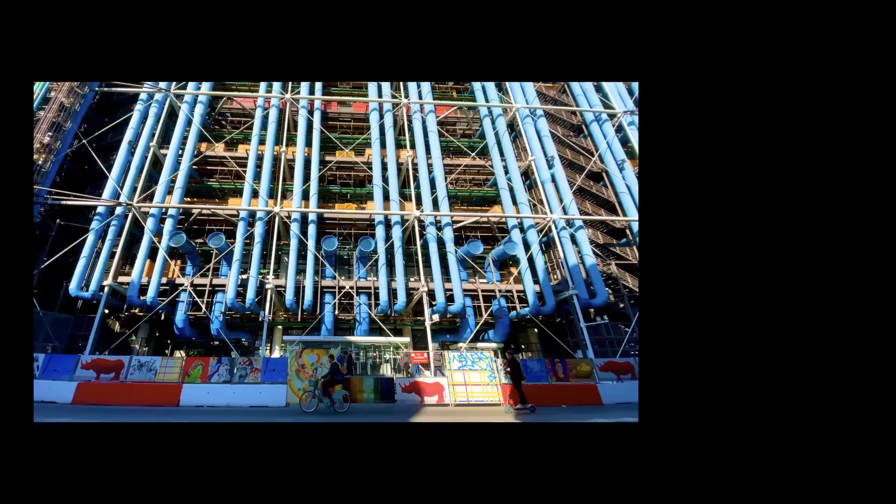Now, as Michael mentioned, I worked, for example, with the company that was renovating the Centre Pompidou in Paris, and specifically this facade that you see here with this bent glass on the hallways and the escalators of this facade. It's called the caterpillar of the Centre Pompidou. And because of the renovation, we needed to replace the glass due to changing security norms. And so we were looking for a new home for the glass.

And here is the new home for the glass. We were able to find a young designer firm called Maximum, thanks also to the collaboration of Pavillon de l'Arsenal in Paris, and all different actors who were involved in trying to find a new home for the glass, which is not such an easy thing to do today, to reuse building materials. It's not so straightforward, even though it should be.

All right, so why do I care so much about the reuse of these building materials, such as the glass from the Centre Pompidou? Well, first of all, the building sector is responsible for about 39% of all of our greenhouse gas emissions. So as actors of the construction sector, we have a huge role to play in the climate crisis.

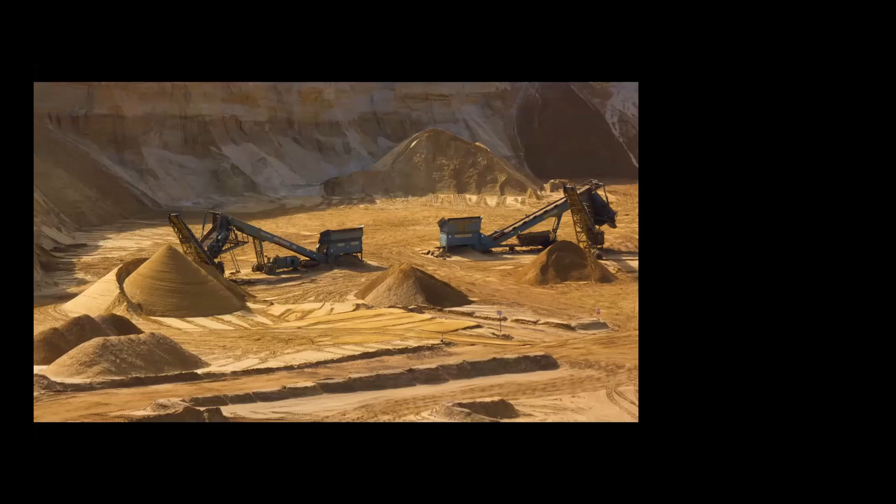But it's not just about the greenhouse gas emissions, it's also about much more than that. And often when we talk about greenhouse gas emissions, we talk about the operational emissions due to heating, cooling, ventilation, lighting, and so on. But when you look at the full life cycle of a building, it goes from the extraction of the raw materials to the transport of those materials to sites, to the construction, maintenance, and then in the end, end of life, demolition often. And so when you look at this full life cycle and you think about all of the resources that we deplete also to build our buildings, it's really crazy.

For example, we mine about 40 billion tons of sand every year, just because desert sand is too fine for construction to make concrete, for example. And this mining of sand is often at the cost of biodiversity, and we even have sand mafias forming, because sometimes it's done illegally as well. Just because we need so much of it for construction.

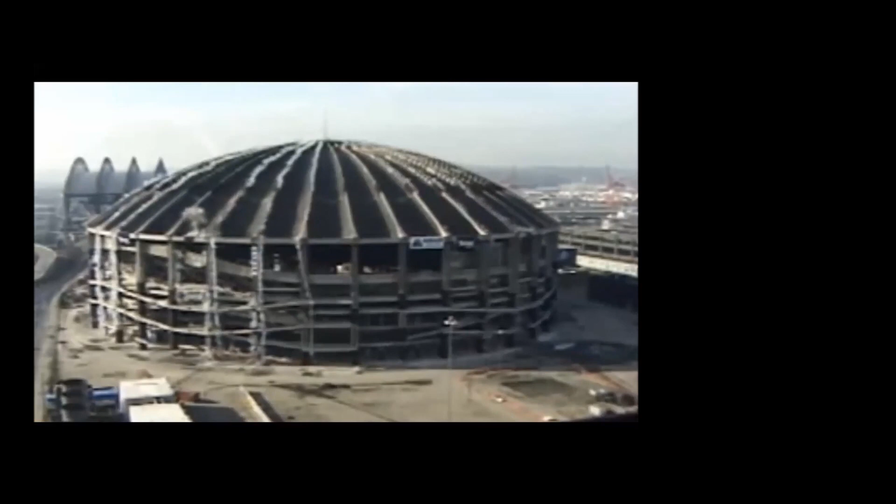We also create a lot of waste. Here you see the Kingdome in Seattle that was demolished only 24 years after its construction. And this happens so much. Our buildings have increasingly shorter lifespans. And this is really a problem that we create this huge amount of waste. In Europe, for example, 30% of all of our waste comes from the construction and demolition sector. And this number is even higher in Switzerland.

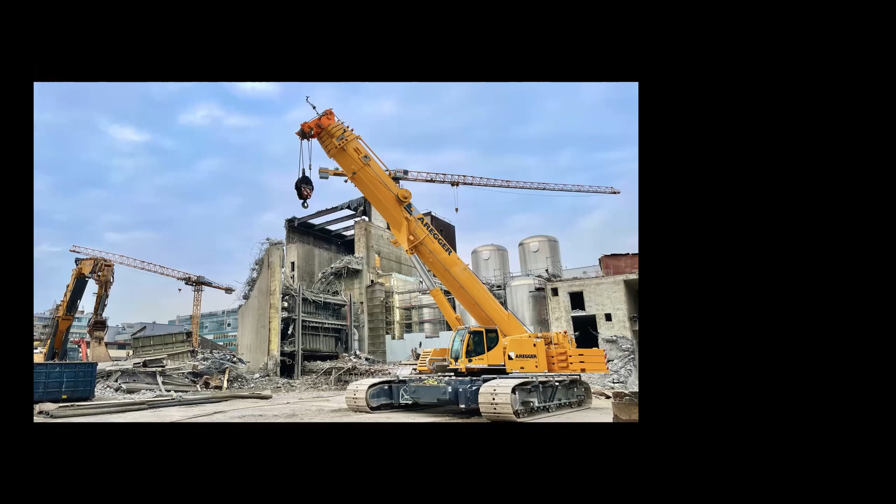Now, why is that? Well, it's because our construction sector is really built based on a linear model, a linear economy model. We extract raw materials, we produce building materials, we use them, and then we dispose of them. This is a picture I took in Zurich. These are the typical demolition sites. Anywhere you can see, we just demolish things, and yeah, this is not how it's supposed to be.

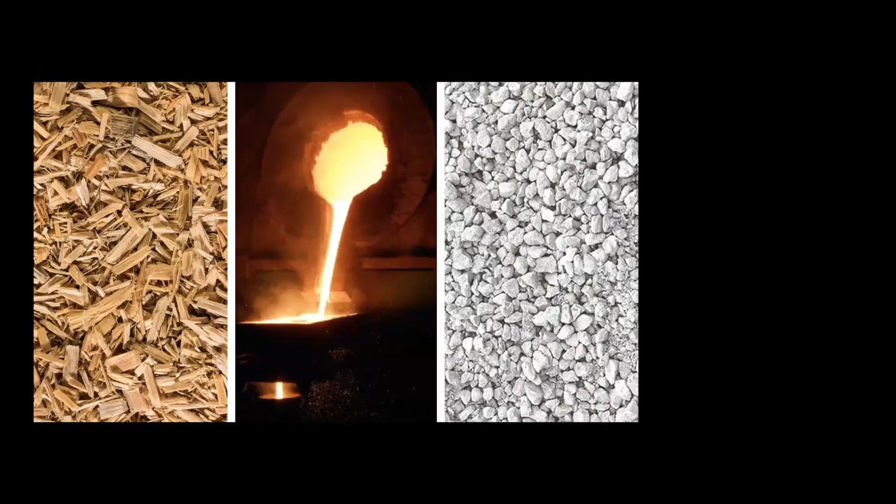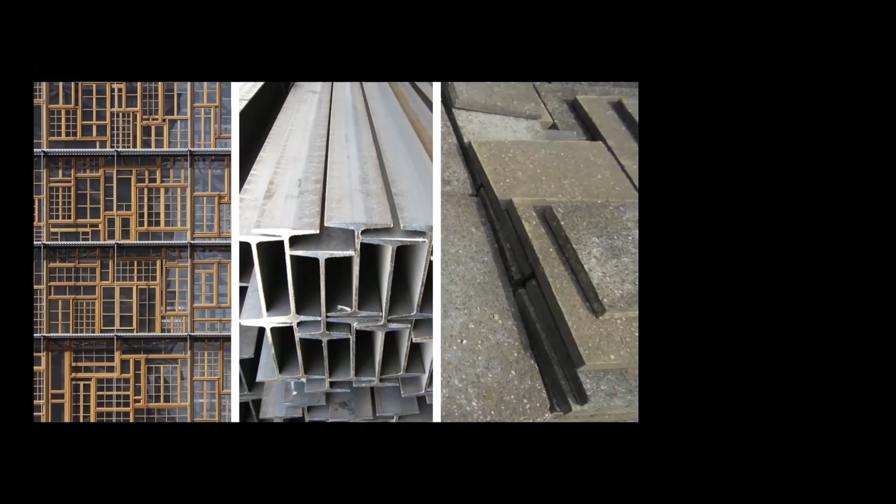Now, often we talk about recycling, and our lab is really working on reuse. And I just want to pause a bit on the difference between recycling and reuse. So when we think about recycling, it's using energy to bring a component back to its raw material. So think of wood chips, for example, or melted steel, or crushed concrete aggregates, and so on. When we talk about reuse, it's actually keeping the component as it is and trying to reuse it. Sometimes it has a different function, but it's still the component, and all of the energy and effort that went into making this component is saved as well.

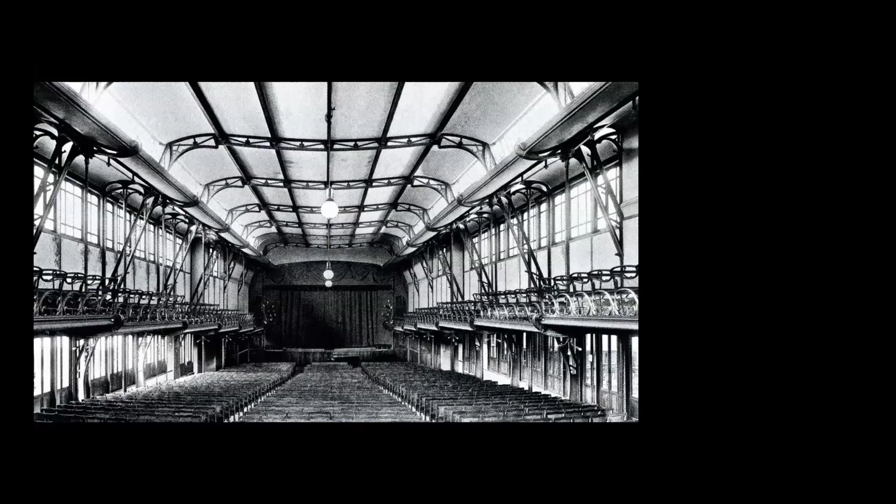So think of wooden window frames that were used for the European Council in Brussels, or think of steel beams that you can reuse, or concrete slabs that you can reuse. This has been done before. But it's not the business as usual in the construction industry right now. And that's really what we're trying to see, whether we can explore digital innovations that can make this business as usual. And here's why it's important to think about reuse and not just recycling.

Now, my PhD students went there last week to scan the structure, to also make a point cloud of the structure and try to evaluate how much embodied carbon was saved by reusing a structure and comparing it to similar spans of other buildings. But what I wanted to show with this example is that it would be a shame to have melted down the structure back to its raw material. If we would have recycled it, that's what we would have done. But we would have lost all of the effort, all of the art, all of the craftsmanship that went into making this structure as well. And of course, all of the labor. And so that's also something to take into account.

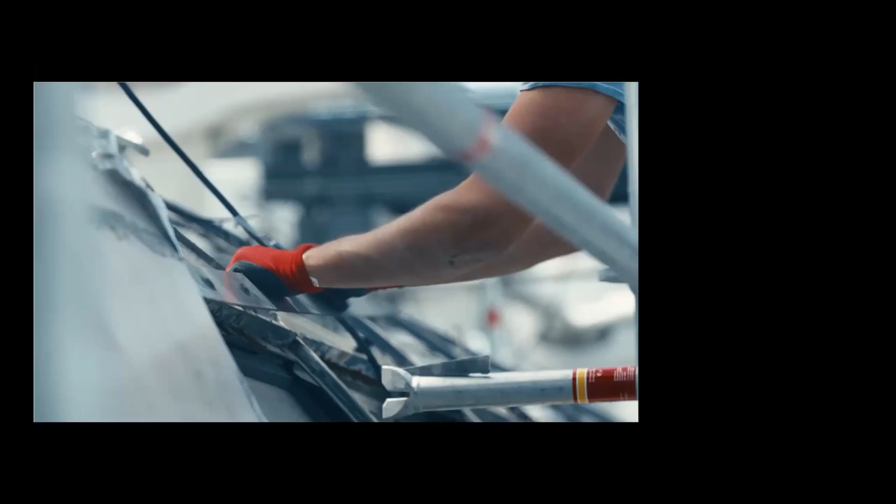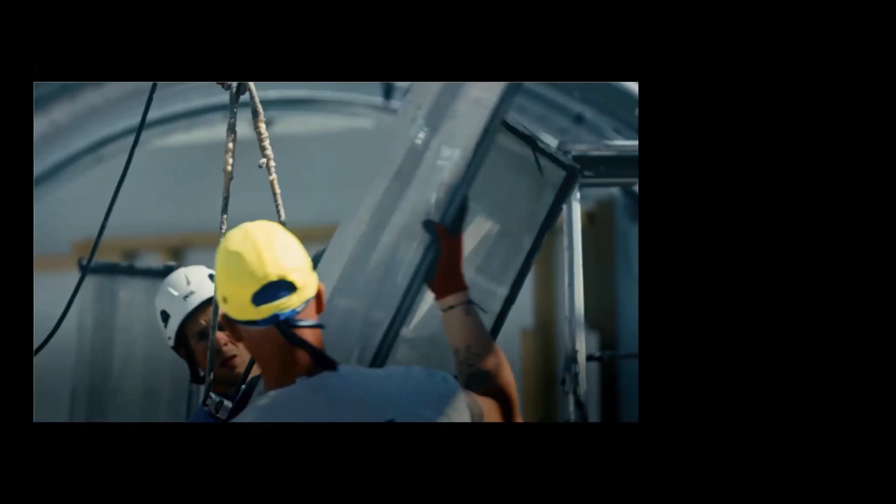Of course, you're probably thinking, well, they stored it for 35 years. That's not a very efficient way of dealing with the construction waste, and that's totally right. We should not store materials for 35 years. We don't have capacity, we don't have space for that. And that's why we need to align the moment when we disassemble a building like the Centre Pompidou that you just saw here in this video, and the moment when we reuse those materials in a new construction site.

So here, the glass was immediately reused in the new project that I showed you a couple slides ago. But to do so, we really need to align the moment of the end of life of one building with the start of life of another building. And that's sometimes tricky to do. We need a lot of help also with logistics. And that's really where our lab's research comes into play.

It's really trying to use digital innovations to have as much information in advance as possible and to start trying to do the matchmaking of who needs materials and who has materials available for reuse. Now we do this in 5 different steps. So first we collect data on a city scale to see where and when materials will become available for reuse.

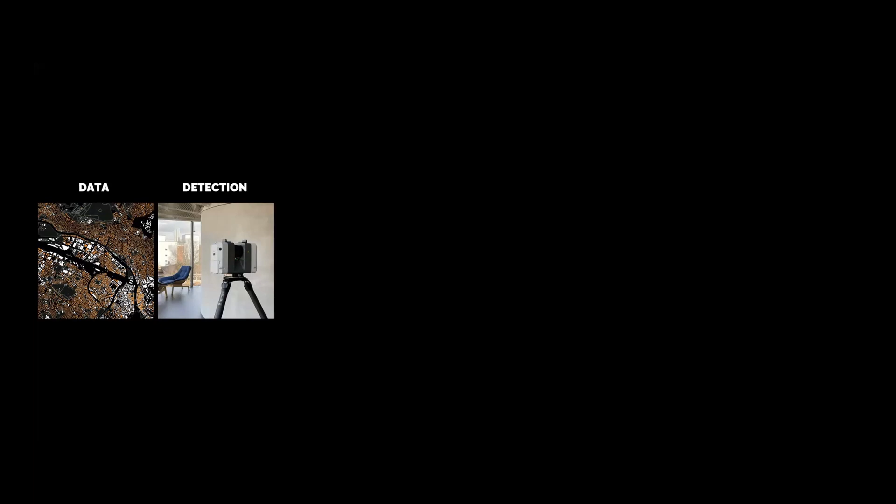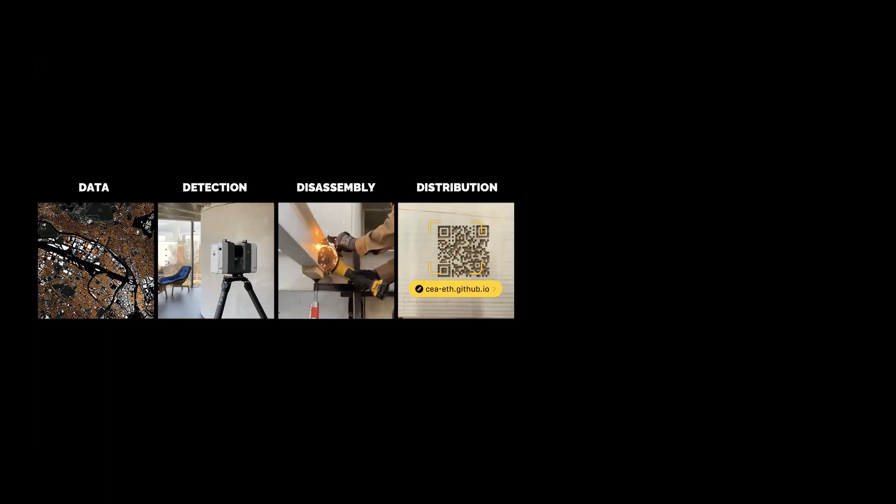Second, once we've established a building that will be demolished, we try to detect which materials are in there. Then we disassemble the building and try to make this as efficient as possible. Then we create techniques to distribute them as efficiently as possible. And in the end, we also change completely the way we design buildings. We shift this around.

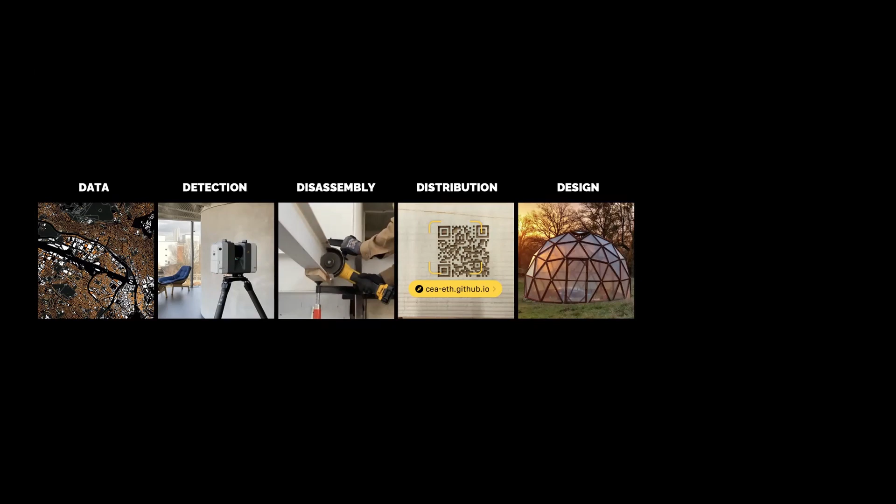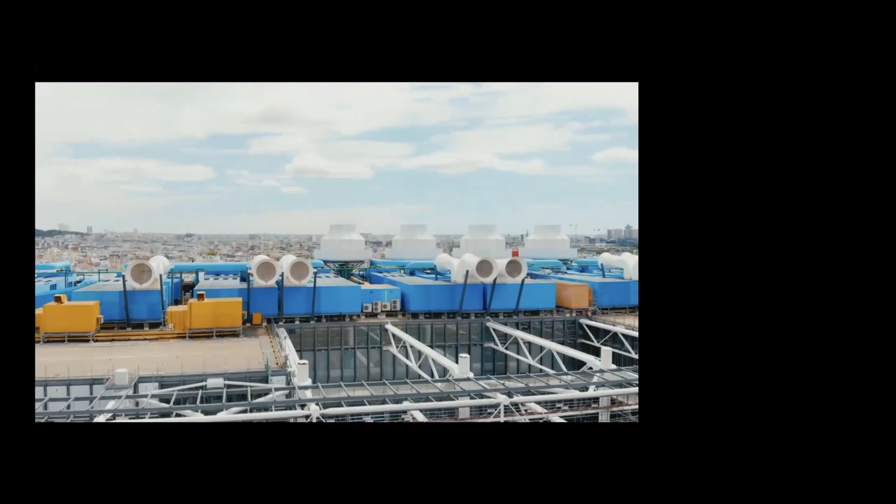Now, could digital innovations help us with these different steps? Could digital innovations help us not only reuse this glass that you saw from the Centre Pompidou, but also the materials of other buildings, not just glass, but all building materials, and not just iconic buildings like the Centre Pompidou or the Maison du Peuple from Victor Horta, but also all other buildings worldwide. That's really the question we want to solve: how do we reuse as much as possible in the construction sector?

And to do so, we really need digital innovations. We strongly believe that that is really the way forward as one of the techniques to help us go forward. And when you look at the construction sector, it's quite slow in adopting innovation, and very much digital innovation. The adoption of digital innovation is quite slow in the construction sector compared to other sectors.

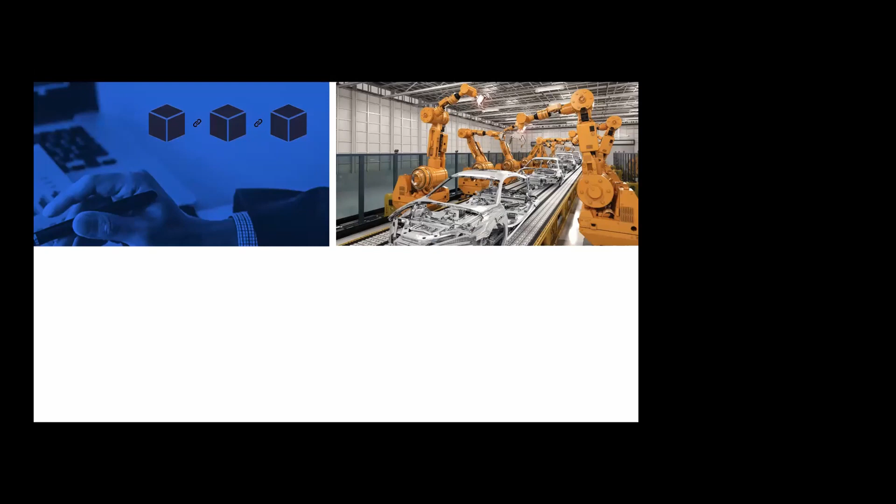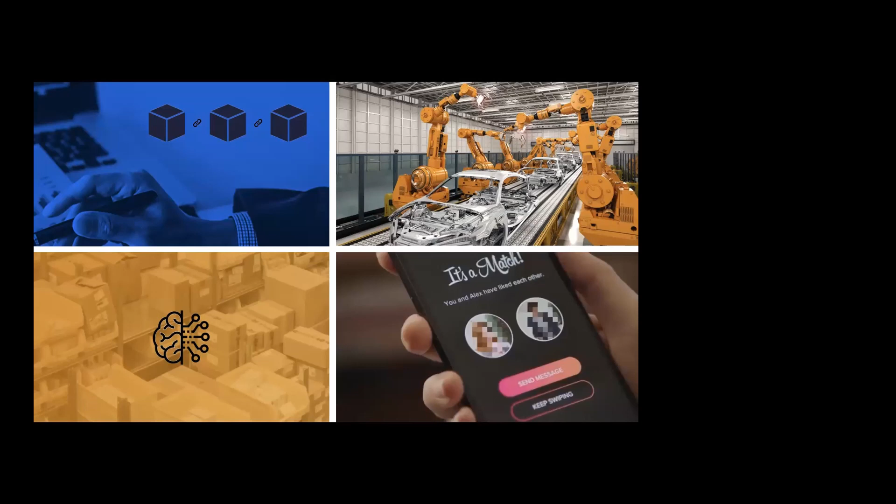For example, in the financial sector, 20% of traditional banks already use blockchain technology. The car manufacturing industry is full of robotic fabrication. Artificial intelligence is literally everywhere, from online marketplaces like Amazon to matchmaking platforms such as Tinder. And so would all of these digital innovations also be useful for the construction sector? And that's really the question we're trying to answer.

And we're trying to look at things from digital fabrication to blockchain technology, going through different aspects like computational design and artificial intelligence, to see where it could be useful to adapt those new technologies in the construction sector and to solve the question of how to shift from a linear to a circular paradigm.

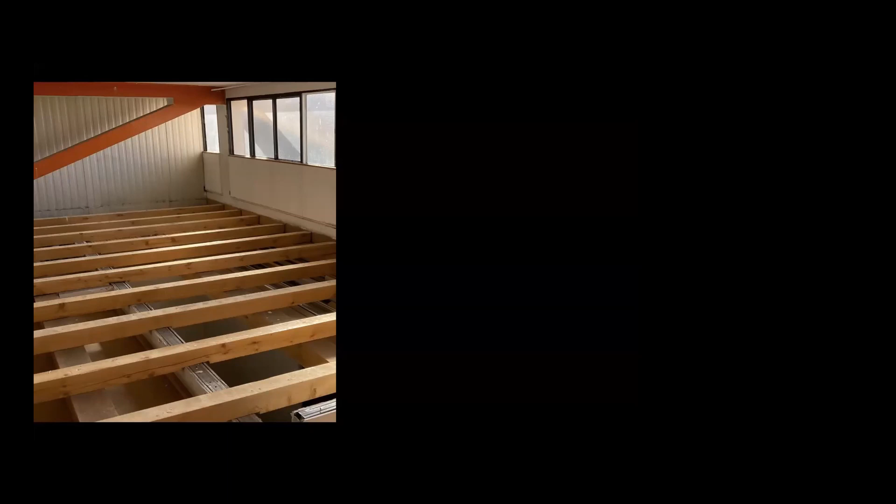All right, so of course, when we do this research, theoretically things are always possible, but in practice, we have some real world challenges to deal with. And that's why we also apply it to real world case studies. Here is an old car warehouse in Geneva that we actually disassembled. We did this in collaboration with Materium, who is one of the big reuse actors in Geneva, and they had access to this demolition site.

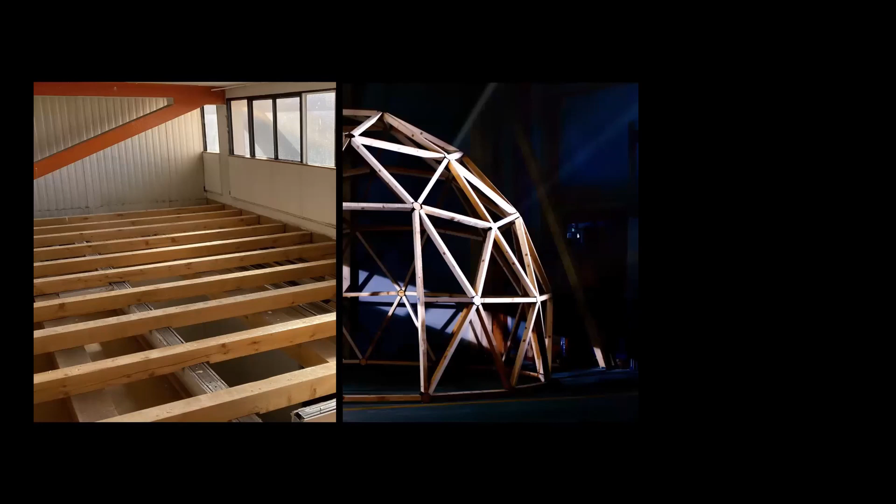So this building was getting demolished, and we went there and assessed all of the materials that we could recover, and then actually disassembled the building and built a dome with the recovered materials. For those of you who joined earlier, we were talking about this dome, and there will be a version of this dome on campus this summer.

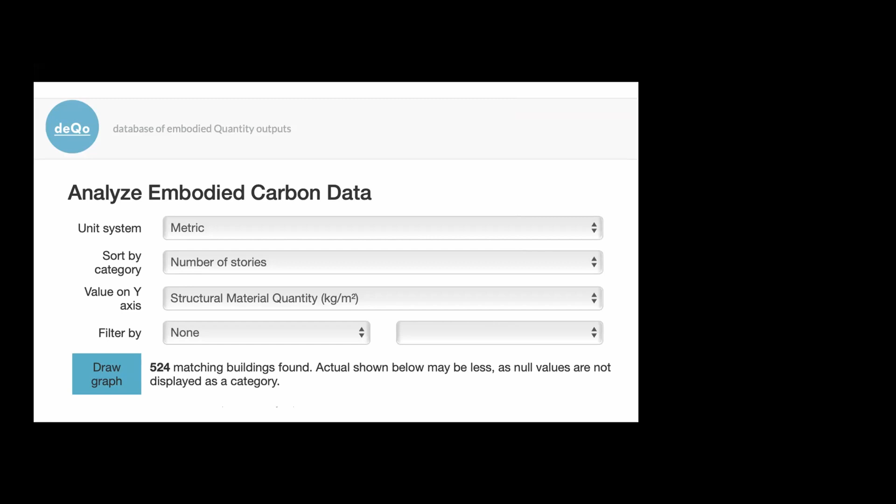All right, so as I mentioned, there are 5 steps, and the first step is really about data. It's really important to have as much data as possible to predict when materials will become available for reuse in a city. During my PhD at MIT, I already started to create a database called the Database of Embodied Quantity Outputs, which was collecting structural material quantities of buildings from companies such as Arup or Thornton Tomasetti.

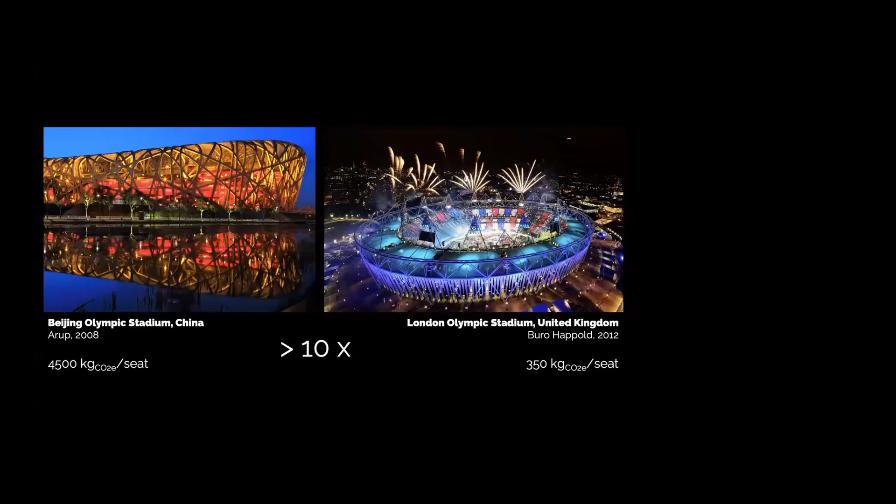And so you have more material per square meter of floor area for a tall building. Another thing that I learned from this database was that the Beijing Olympic Stadium had more than 10 times the embodied carbon per seat than the London Olympic Stadium.

And that's interesting also because when you look at the design goals of the two different Olympic Games, London Olympic Stadium was built 4 years later, and a lot of things had shifted in what the priorities were in those 4 years. Sustainability became really more part of the conversation of the designers, and they had put this as a main goal at the beginning of their design stage.

So they used lower carbon concretes, they reused some of materials from a gas line construction site nearby. They designed it for partial disassembly after the games to downsize also the stadium and so on. So it is possible for designers to have a huge impact on the climate consequences of their designs.

Now, this database led to the Structural 2050 commitment, SC 2050, which was created together with the Carbon Leadership Forum and the Structural Engineering Institute. And this is really gathering structural engineers to join the movement, to share information about their structures, and then lower the embodied carbon of their structures each year.

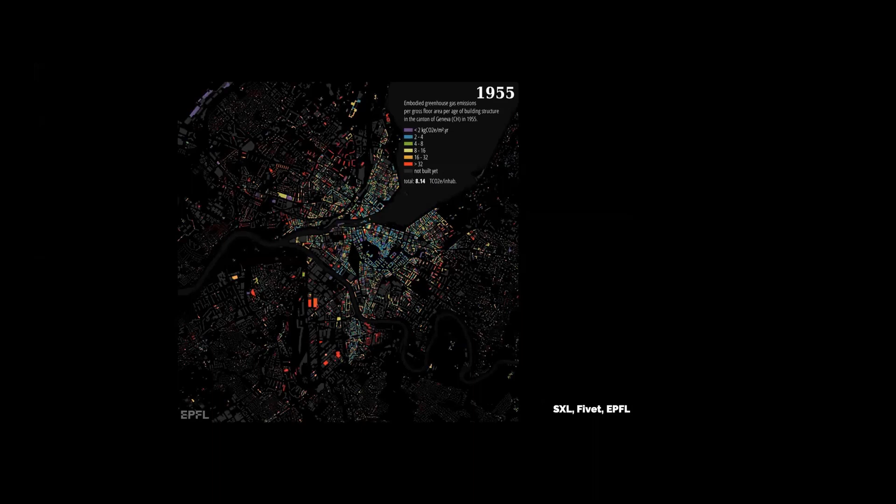Now, when I was at EPFL, we also upscaled this to a city scale during my postdoc at the Structural Exploration Lab, where we looked at Geneva throughout time, from 1850 till today. So we have an evolution of the embodied carbon emissions from that date till today. And this really teaches a lot about the past construction and demolition sites.

Now, we don't only look at the past. At the CEA lab at ETH Zurich, we now also look at the future. We try to predict the future, and we use AI and more specifically machine learning to do that, to predict which building materials will become available for reuse in the future.

So this is the work of Deepika Raghu. She labeled the Google Street View images using an online annotator to train the model. We explored instance segmentation techniques to identify reusable components, and we used a mask region-based convolutional neural network framework for computer vision tasks for detecting the objects such as windows from images of the facades.

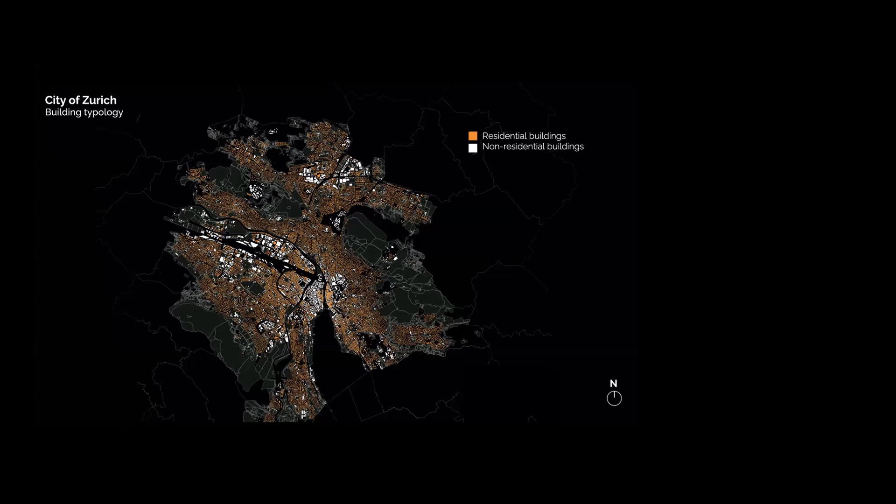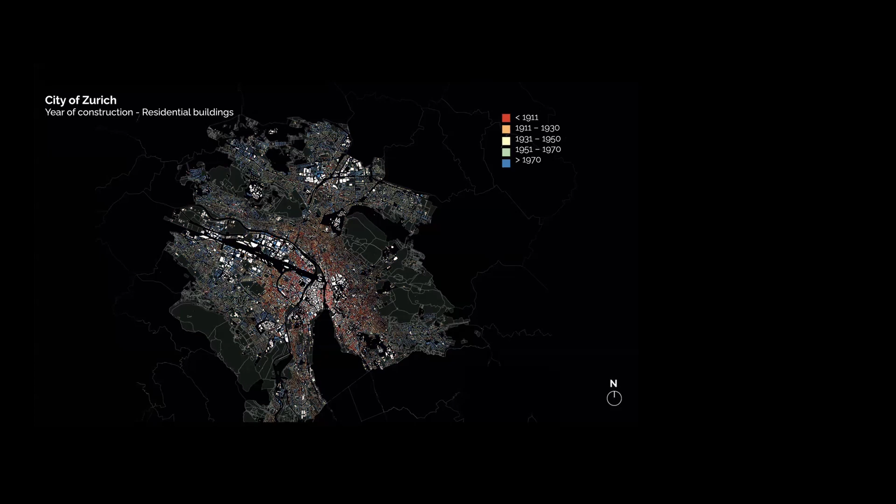We were able to draw a map from residential and non-residential buildings or from different construction periods. So here you see, for example, the red is from 1800s, the orange from 1900, and so on. Here is also just for residential buildings, those construction periods. So you see, we can do a lot with this cadastral data already.

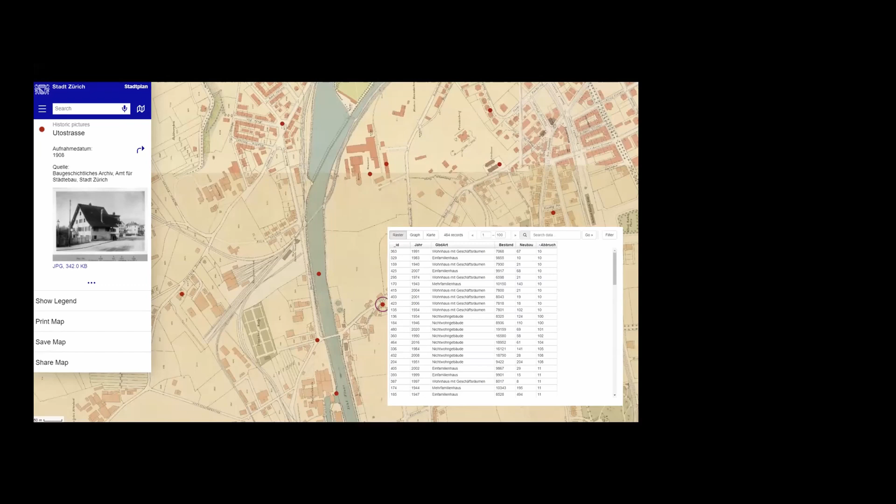Of course, we have other data sources. We can use social media images that people post more and more about their buildings online. We can also use public record data. In Zurich, we're quite lucky because there's a lot of public record data on the city of Zurich. You can see a few examples here.

What's also very interesting, especially when you try to predict the future, is to collaborate with insurance companies to get some of their data, because they also try to predict the future and when they invest as well.

For our work, we also use historic photographs. Here are pictures of the city of Zurich that were made by a photographer in the 20th century. So we have also the exact addresses of all of those buildings, which enables us to also see whether those buildings still exist and how they've evolved over time. That's always very interesting to learn from the past to predict the future.

We also try to use image classification to define which structural elements can be reused based on images of the structures, which are corroded or not, damaged or not, distorted or not, bolted or welded, and so on. And we then tailor reuse and recycling strategies to prevent waste as much as possible. So machine learning and computer vision show really promising potential to visually collect data on building-specific characteristics relevant for component reuse.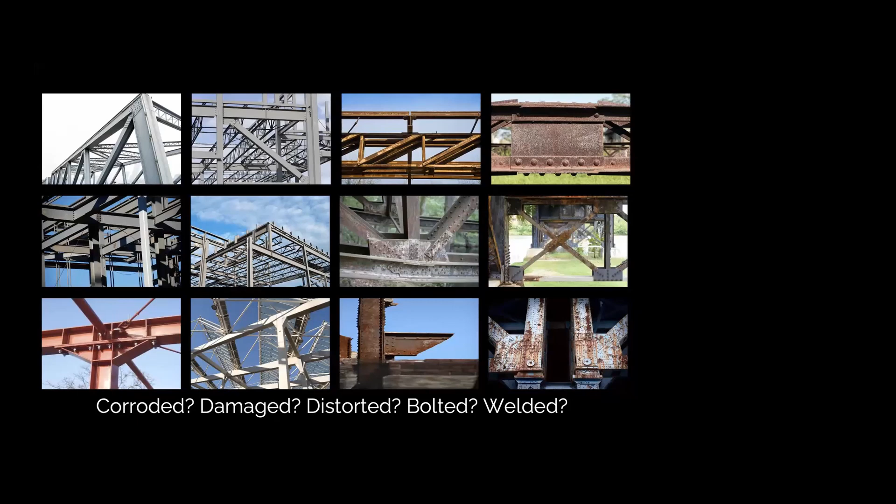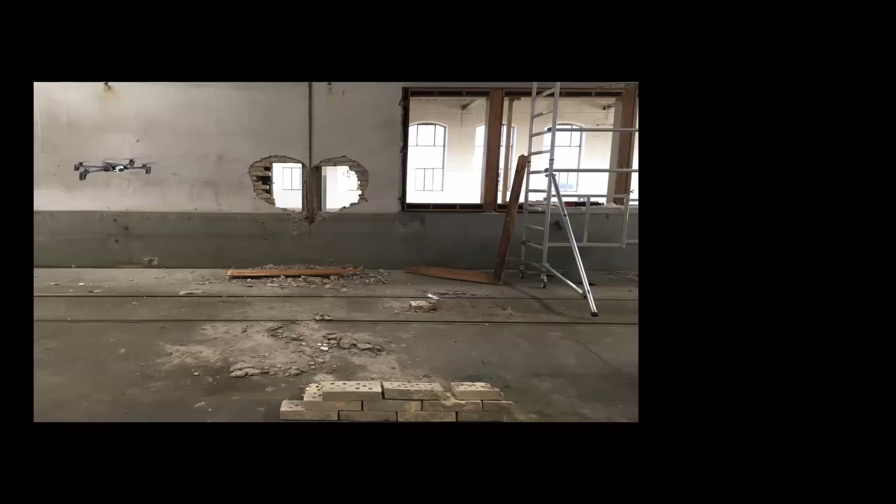All right, this brings us to the second topic that we address in our lab, the detection of building materials in a building before we demolish it. So we use several digital technologies in the field of reality capture. We use simple phone or camera images, or images from autonomous devices such as drones. We also use cameras on top of our hard hats that remember our walking path in the building in order to locate where we took the photos or the videos from.

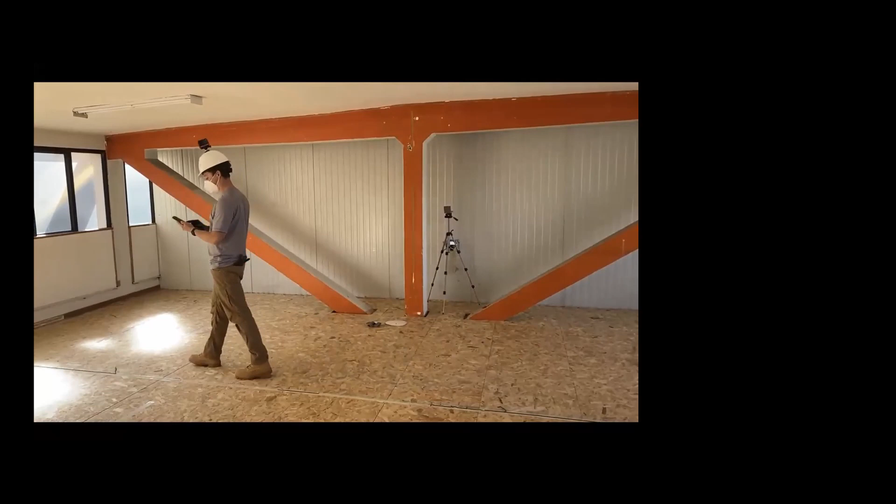Here we see Brandon Byers, one of my PhD students, who is using the OpenSpace.ai equipment to do so. And he's walking around in the building in Geneva that we then disassembled. Then we use photogrammetry to process the images into estimated point clouds of the buildings. This is the work of another researcher in my lab called Matt Gordon.

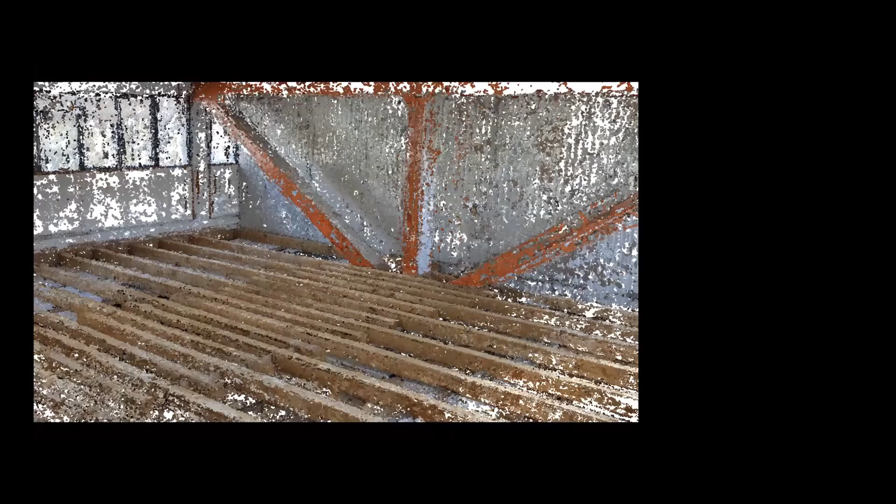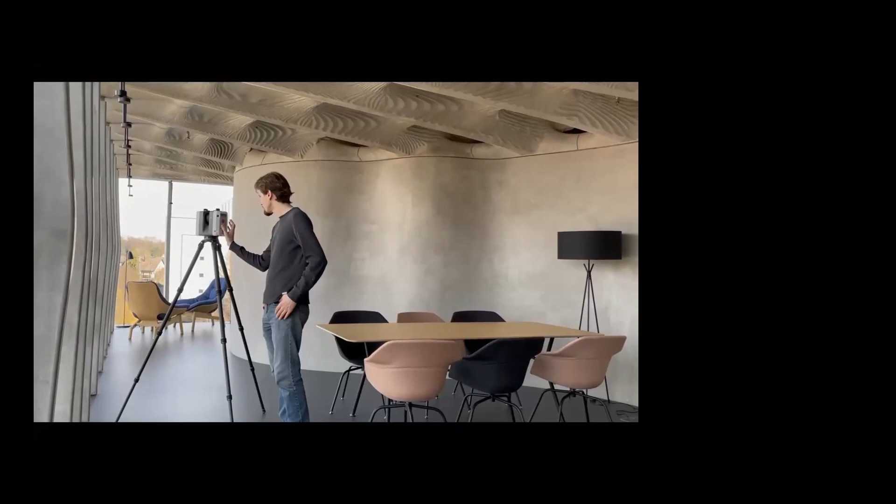So these images show the point clouds that we made of the old car warehouse that we disassembled in Geneva. This building belonged to the Fiat, Lancia, Alfa Romeo importers in Switzerland, but is now obsolete, so they are demolishing it. And so we get to use those buildings to train our recognition software and detection software. And of course, then we try to salvage as much material as we can as a research lab to build our structures with.

So we also test methods such as light detection and ranging, or LiDAR scanning. We tested full-scale LiDAR scanners, which really have the highest accuracy, in collaboration with Design++. This is equipment that we got from the Centre for Augmented Computational Design in Architecture, Engineering and Construction and Design++. So here you see a video of Matt Gordon, who is using the LiDAR scanner in the DFAB House, which many of you know, in the NEST building at Empa.

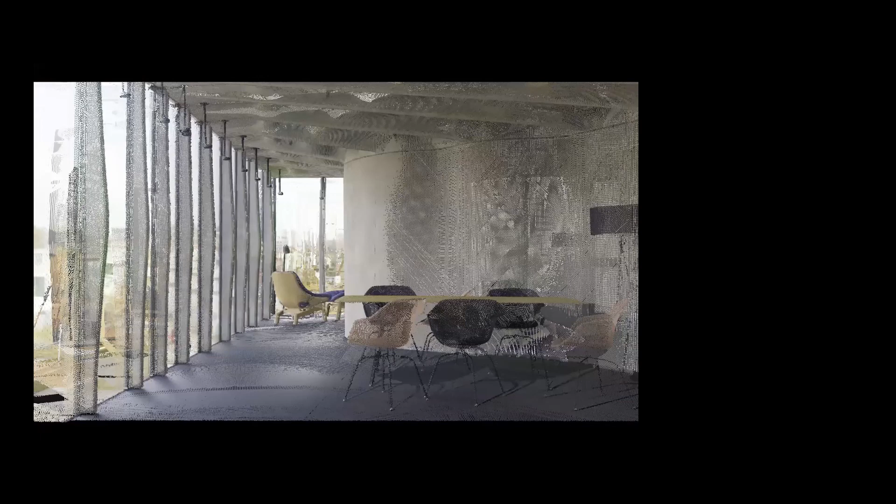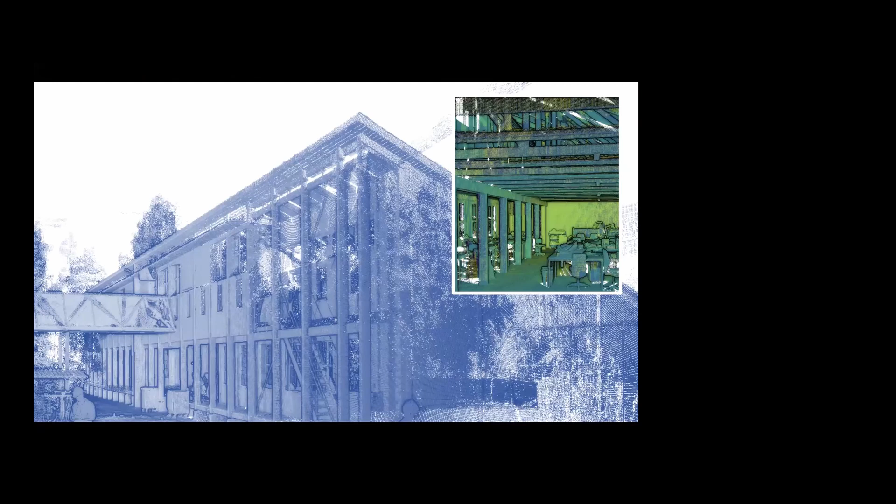And what was very interesting about this research was that we could really compare it with very accurate data, because it's digitally fabricated. So we know exactly everything that's in this building to a precision. And so we can compare our point cloud results to reality quite well. So this was the result of that work. Now, we also want to explore more portable versions of LiDAR scanning and so on. And I'll show you later also some results of the phone camera images that we did.

Here you also see the Huber pavilions, for those of you who know the Hönggerberg campus at ETH. These are pavilions that were built for the architecture students quite a few years ago and that are about to be disassembled this year. And so we try to capture this building too before it gets disassembled. This is really the aim of our work: pre-demolition, getting as much information as possible about the materials in there.

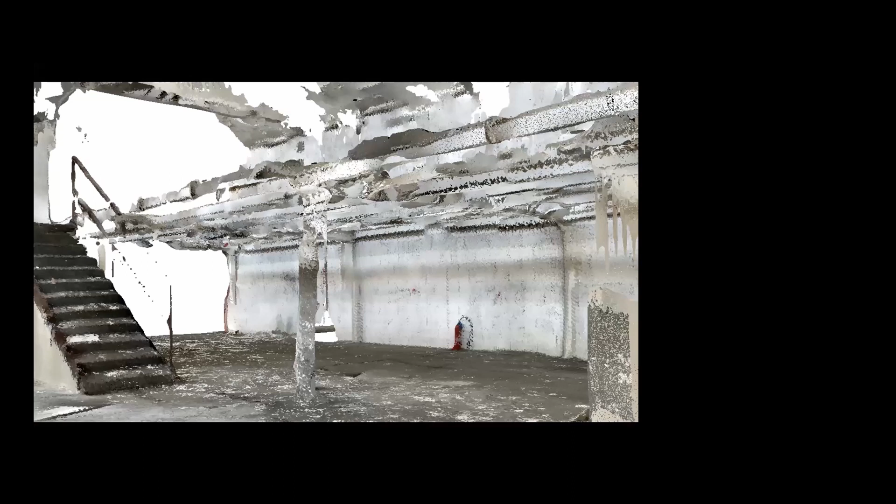This is me with my phone trying to use the LiDAR capabilities on the phone. Some smartphones have LiDAR capabilities, and then you can use some apps that have been developed by some of our colleagues at ETH and EPFL that use this to have a more accurate vision. But of course, it's not as accurate as the full-scale LiDAR scanner that you saw earlier. But the idea here is to understand how we can use affordable and mobile methods as well on construction sites, because we cannot expect everyone, of course, to buy 80,000 francs worth of equipment.

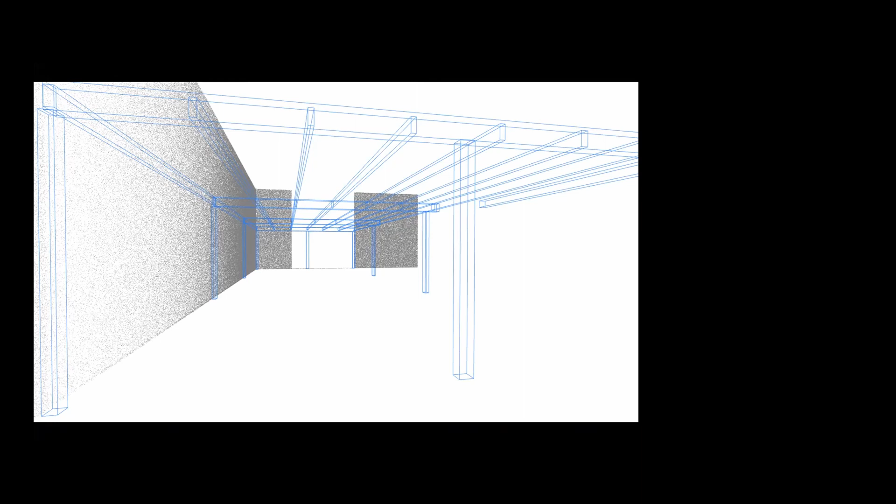All right, so here is a point cloud that we made out of one of the parts of the structures in Geneva. And of course, once we have a point cloud, we also need to shift it towards a BIM model, because this is a lot of data points, but what we really need is a BIM model or an inventory of the materials. And so to do so, we create BIM models using statistics, using point density, using prediction models. So here you see a bit where we try to detect where the columns and the walls and the beams are and so on to create this BIM model.

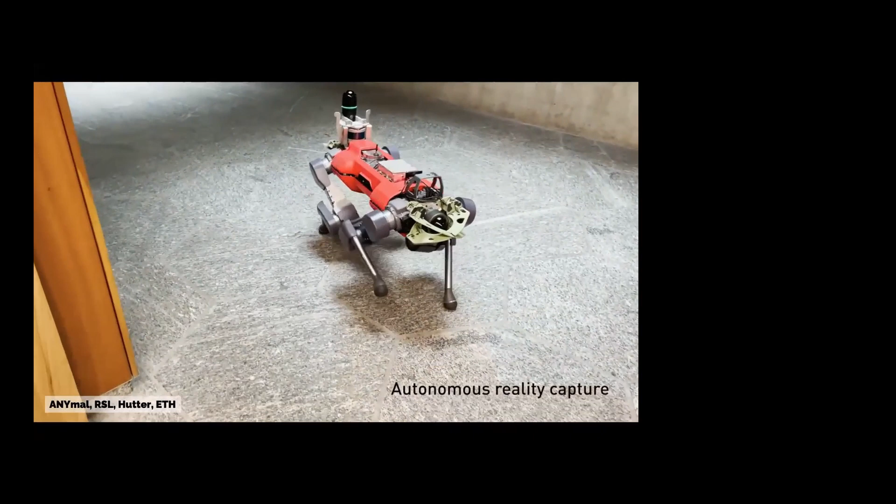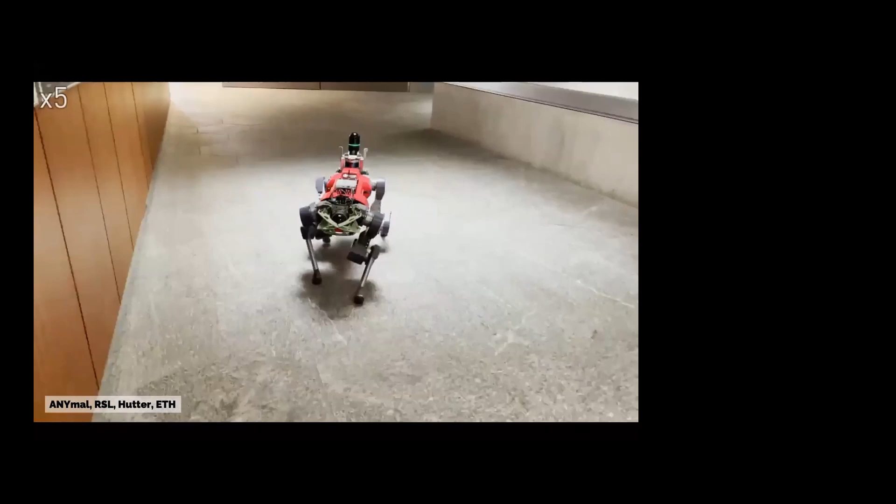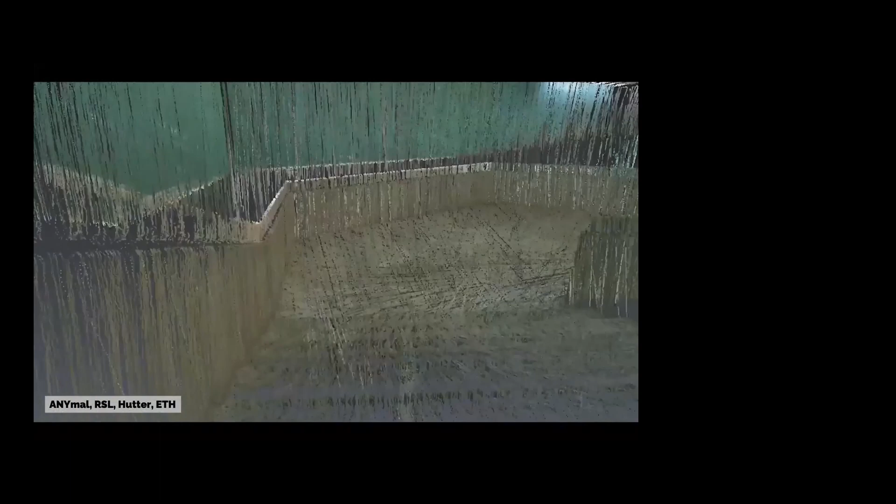Now, the next step in our research, what we would really like to explore, is collaborating with the Robotic Systems Lab here at ETH Zurich. They have done some work with their robot called ANYmal, which is carrying one of those portable LiDAR scanners that I showed you earlier, and that is making a digital twin of the campus. And this could really help us make a very autonomous method of making this inventory of materials in a building before it gets demolished. All right.

So once we have the geometry of the building, of course, we also need to know what types of materials there are in the building and in what condition they are.

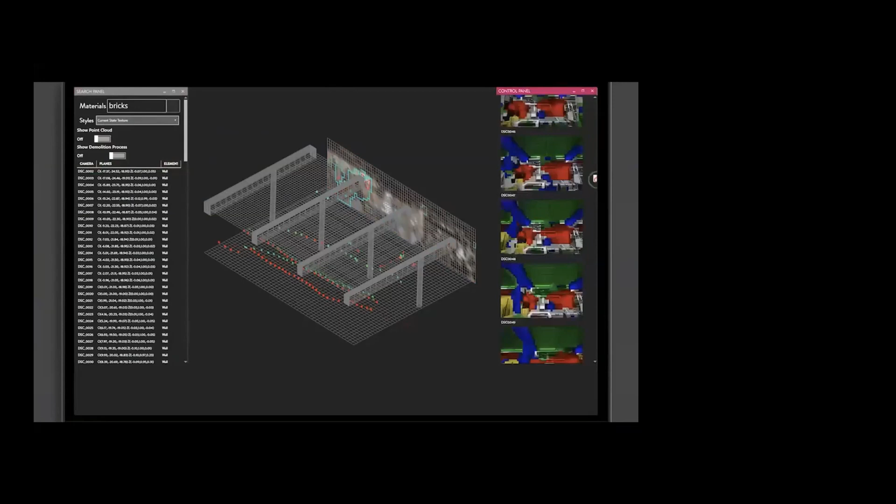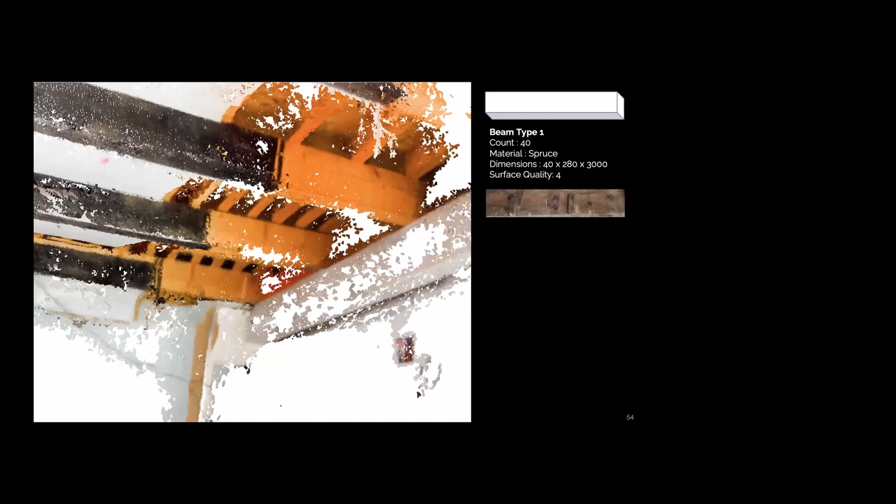And to do so, we use computer vision techniques. This is still the work of Matt Gordon, where he detects which materials are steel, masonry, concrete, and so on. And so those computer vision techniques can also be used to look at the condition of the materials in advance. So this enables us to create a building material inventory where we have for each of the materials that we want to disassemble, the type of wood, for example, the dimensions of these beams, the condition, the quality of the surface of the beams, and so on.

So here is the BIM model and the inventory that we created of the building in Geneva. And this inventory was very useful for the design stage, which I'll talk about later on. One other thing that we are planning to explore with the Design++ community is how to use virtual reality also to walk through a building pre-demolition and having information about the building right away through virtual reality.

All right, so once we have as much information as we can get from the building, we have to start a disassembly of these obsolete buildings. And to do so, we also explored different techniques, but what we really do is actually disassembling the building in Geneva. Here is a picture of another building in Bern that we disassembled with students from EPFL when I was teaching there, together with Martin Fröhlich from the EAST Lab, and with Renaud Haerlingen from Rotor. And this was a building that was about to be demolished by Losinger Marazzi to make space for real estate. And it was the old tram depot in Bern.

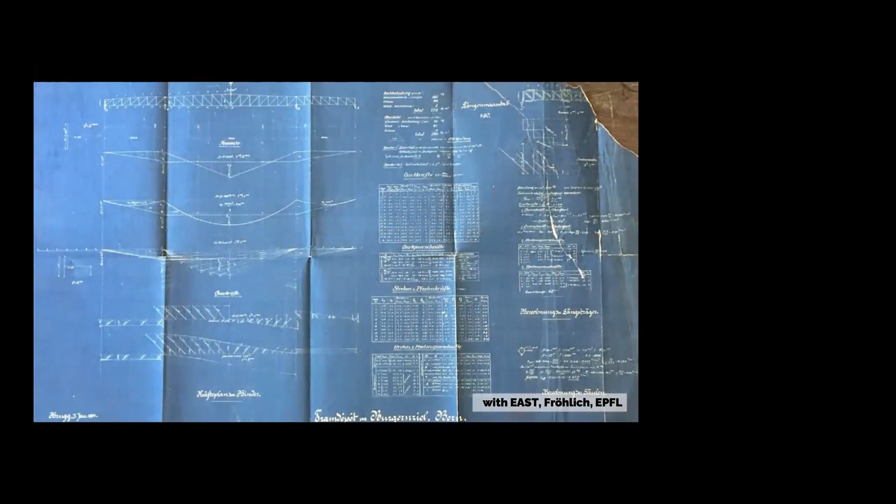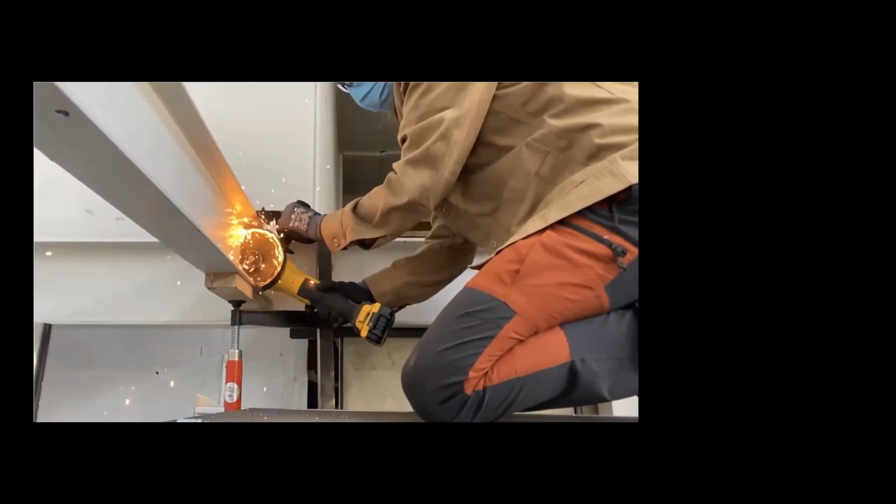And it was dating from 1906, so we didn't have much information about the building other than these blueprints, which we found in a very random way when some guy walked by the construction site, or the deconstruction site, I should say, and told us that he had those blueprints at home. So some private person had the information of the tram depot. So in the meantime, my students were exploring how to disassemble such a structure for reuse. This is me cutting a steel beam in the Geneva warehouse that I talked about.

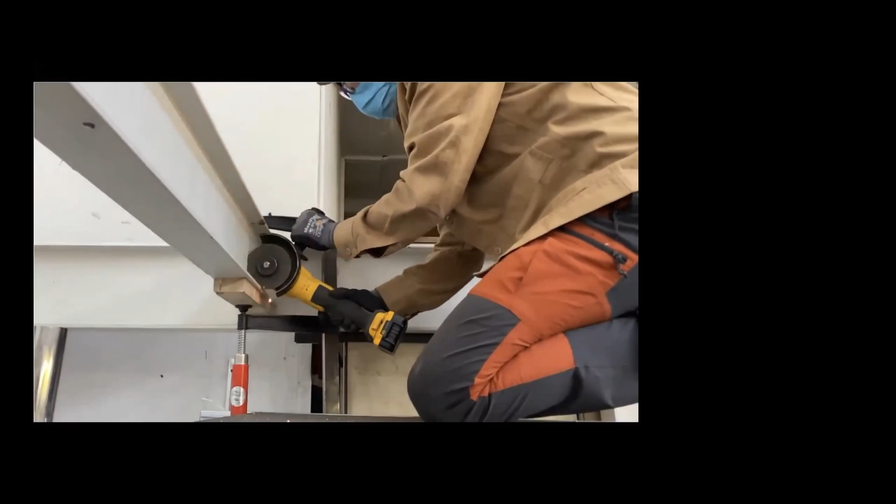And this is a very interesting way of learning about the deconstruction of buildings and the energy that this costs, because we had to recharge the batteries of those battery power tools every beam that we were cutting. So it taught us a lot about the energy needed for cutting those beams. So I think this also makes us think about those connections in the buildings. The welded connections are obviously a bit more energy consuming to disassemble than bolted connections, for example.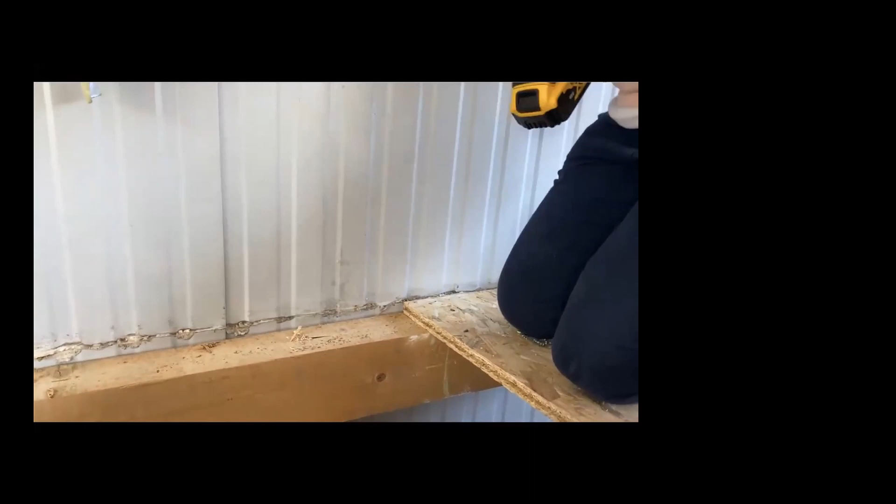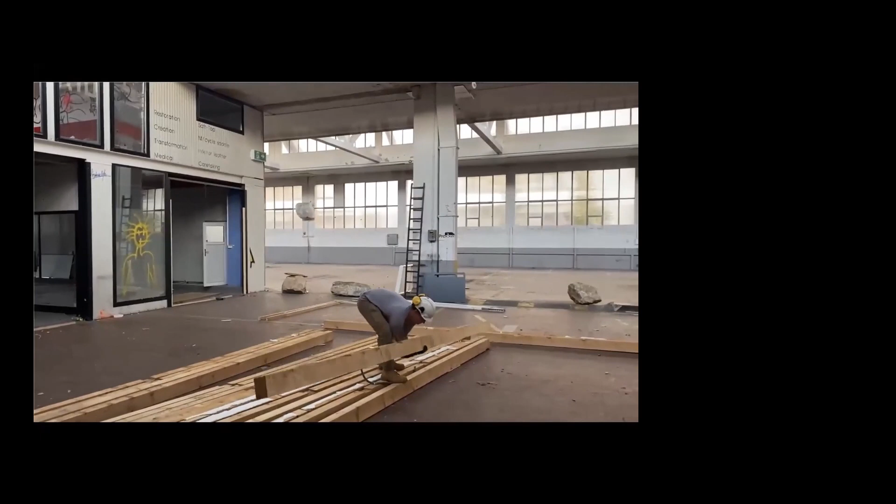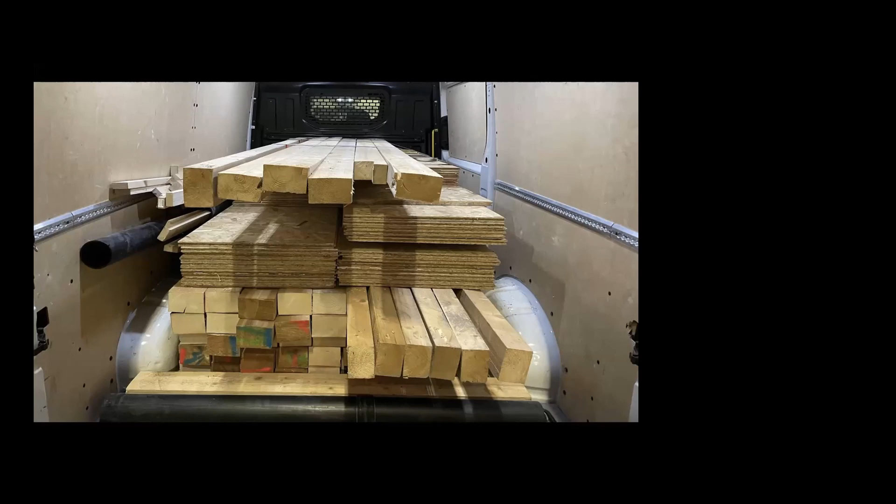And here you see us disassembling those timber beams, which are much easier to disassemble because they were just screwed together. And then came the challenge of transporting those beams, because those beams are quite long. Some of them were 7 meters long. And this is Brandon Byers who is carrying those beams. And this is me and Deepika Raghu carrying some of the beams to the van. And this is our van, which was only 3.5 meters long. So of course, there is a challenge there to bring them to campus. So we had to associate with materials transporters so that we could bring the rest of the beams.

And then we had to store them also on site at ETH, where there is also not so much space, of course. We're a campus, we're not meant to store building materials. So there's also a challenge there. So this was really hands-on learning for the entire team, that we need a better logistics system for deconstructing, transporting, and storing materials while we process them for reuse in a new building. So here you see our processing. We were scanning the beams to see whether we had forgotten any screws or metals in the timber beams, and then we remove them. And then we also plane the beams to remove any surplus.

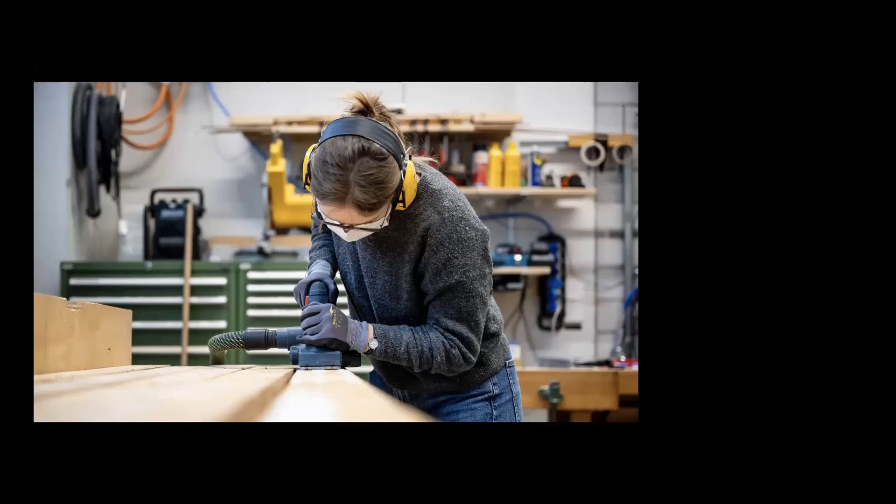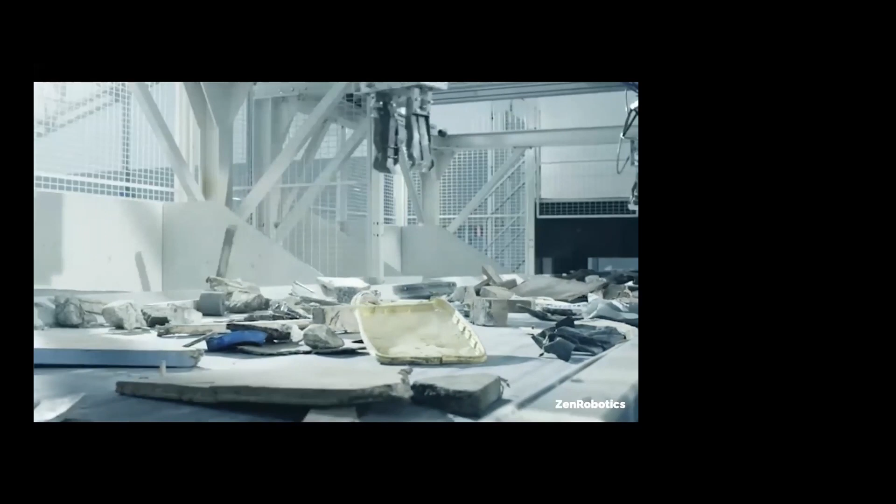Then we explored also how we could use digital fabrication to assemble the dome. But in the end, we used digital fabrication only for the connections, because sometimes you really have to evaluate when it's useful to use robots and when it makes sense. However, I think it's interesting to talk about ZenRobotics, who are using computer vision as well, and robots to sort construction waste so that they can recycle it afterwards. So here you see they take pieces of wood, I think, into one bench and then stones in another, and so on.

So I think it's not so far-fetched to think about robotic fabrication being used for the reuse in the future, not just for recycling. All right, so once we have disassembled the building, we needed to think about a smart way to distribute those elements in the future. And what we did is we used QR codes to label each of these beams.

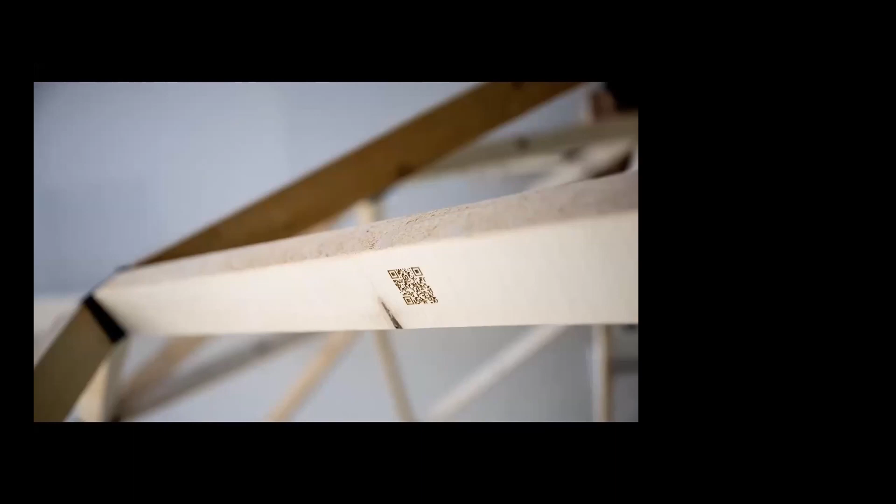This is the work of my PhD student, Brandon Byers, who engraved all of those elements with a laser engraver. And he was also testing making labels and so on. You can really go from different directions, but here we chose the QR codes. And when you scan the QR codes, it brings you to a database that you see here.

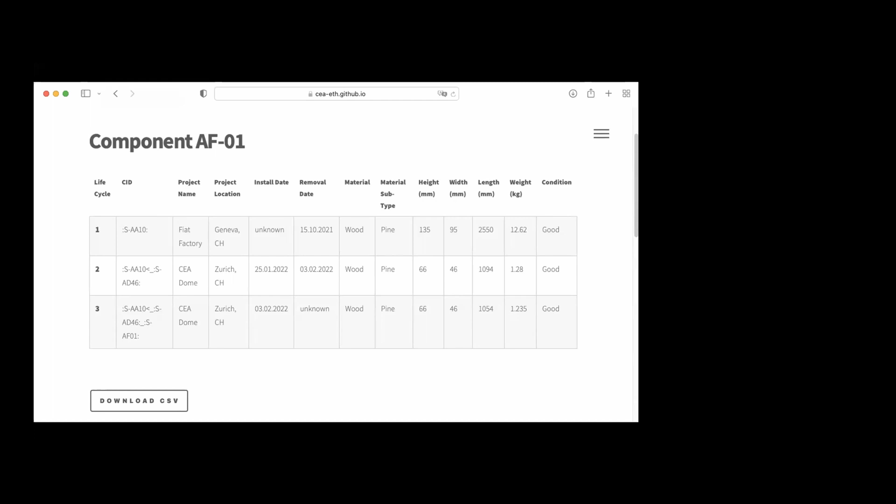That gives you all of the elements of the dome that we constructed and where those elements had been before, and what the dimensions are, what the weight is, what the condition of the materials is, the type of wood, and so on. It gives a lot of information. It also gives you information about all of the other components of that same type, and also all of the different types of components that you have in the dome.

So this is what we call a material passport of a building. You have information on each of the materials, and you know exactly how much of those materials are in the building. And this is something that we work on together with companies such as Madaster or Concular. We try to see how they bring this type of thinking to the market.

Having a material passport of your building, how can this help you earn more out of your building as a building owner? It's not just about the value of your building as a rentable space, but also the value of the materials that are in your building. And once you disassemble or renovate your building, what can you get for these materials, and how can we reuse them and upgrade or upcycle them as much as possible?

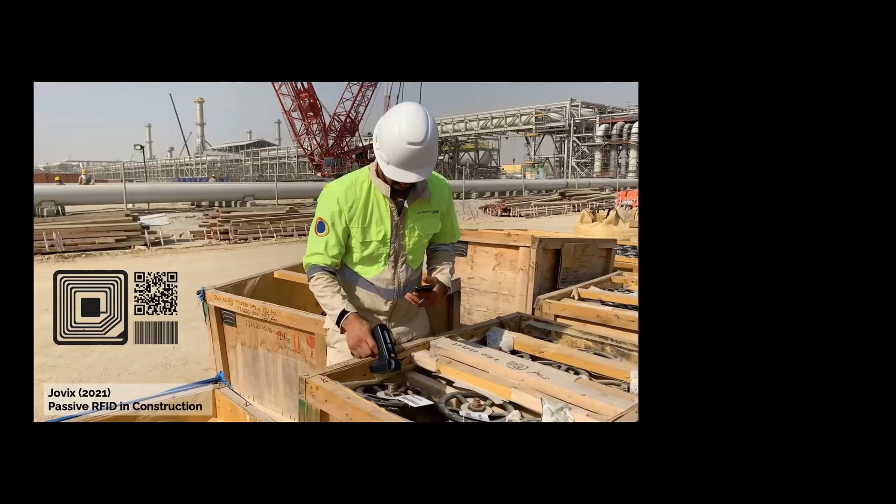All right, so to label these, we use QR codes, as I mentioned, but you can use anything from barcodes to RFID chips. The advantage, for example, of RFID chips is that it doesn't need to be visual to be scanned, but then you need a special scanner. We chose the QR codes for the dome just because we wanted everyone with a smartphone to be able to read the information when they walked by on our site. But there are many interesting different ways of labeling materials, and we wrote a conference paper about this recently, if you're interested.

All right, so once you have things labeled and linked with the material passport, with a digital twin, then you can also connect different buildings to each other and start using the Internet of Things as well to basically connect information and help with renovation, with replacement, with refurbishment, and so on. So that's also very useful to explore. And as I showed earlier, we also do research on a city scale with the data on the city of Zurich. So this is combining these two research streams.

Now, the construction industry has regularly been cited as one of the most fragmented sectors, and blockchain technology could help connect the supply chain through transparency and traceability for the relevant parties. So blockchain technology could give transparency into where materials are, but also traceability, showing where materials have been.

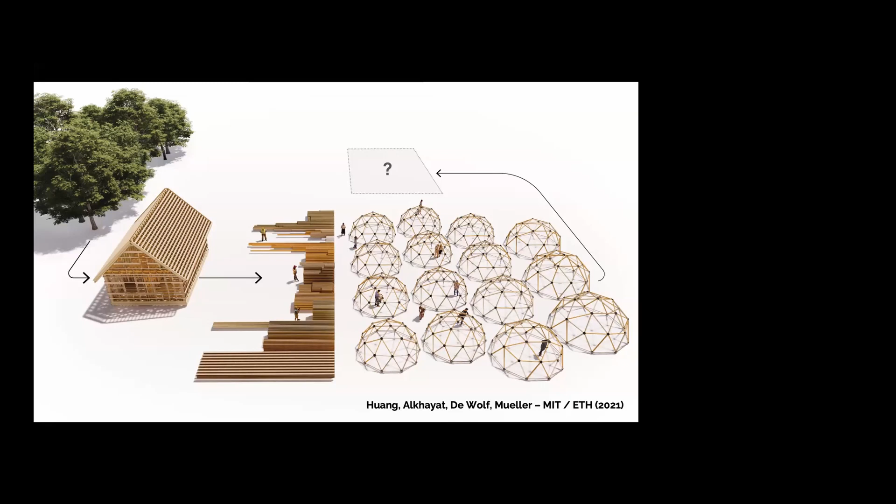Now, together with MIT, we have applied computational design algorithms to a stock of timber elements in order to create geodesic domes, as you can see here from this image. So here it was for a timber framed house in the US. But here you see the inventory from our building in Geneva. And so we did exactly the same to build the dome on the right that you see here, that was built on the ETH campus this winter. And that is now standing in Ghent.

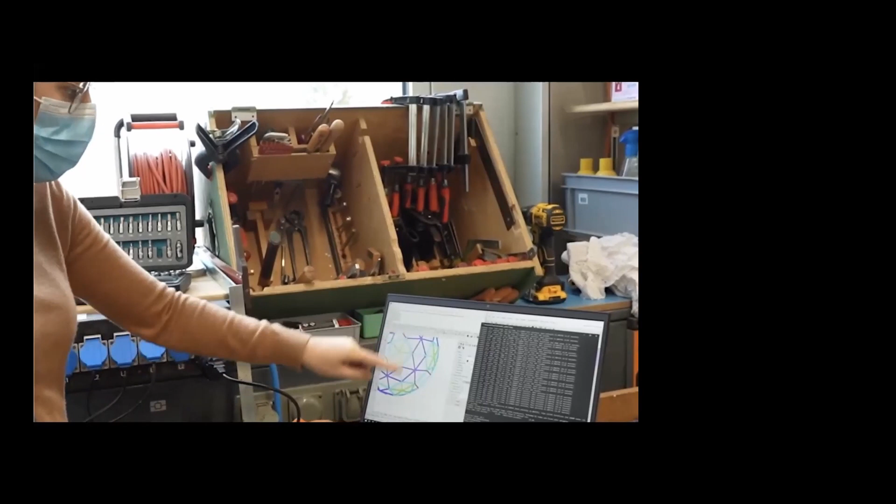So we discussed the different choices that you can parameter into Rhino and Grasshopper, and we discussed the different design choices that we put in the computational design algorithm in order to make the best choice for our dome. So we wanted to use the shortest beam first in order to keep the longest beam for a bigger construction later on. We also wanted to minimize the waste, of course, which is the white part that you see here with the dotted lines, which we then also used to build furniture for our dome.

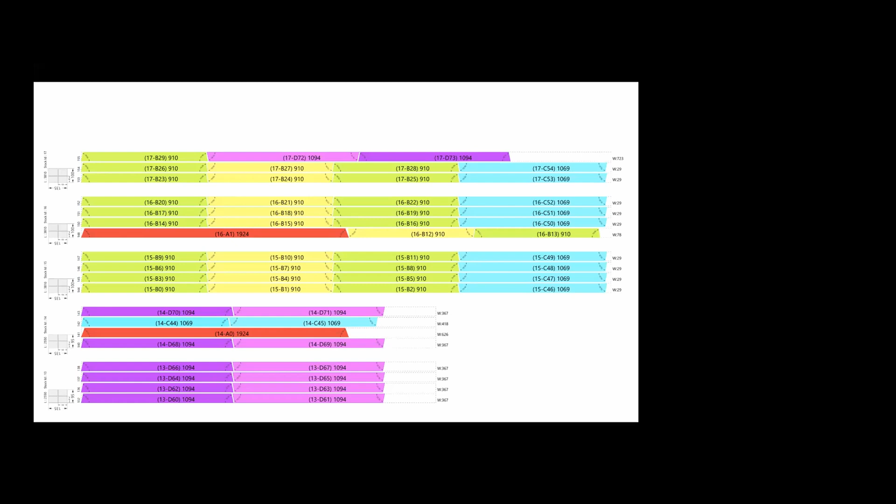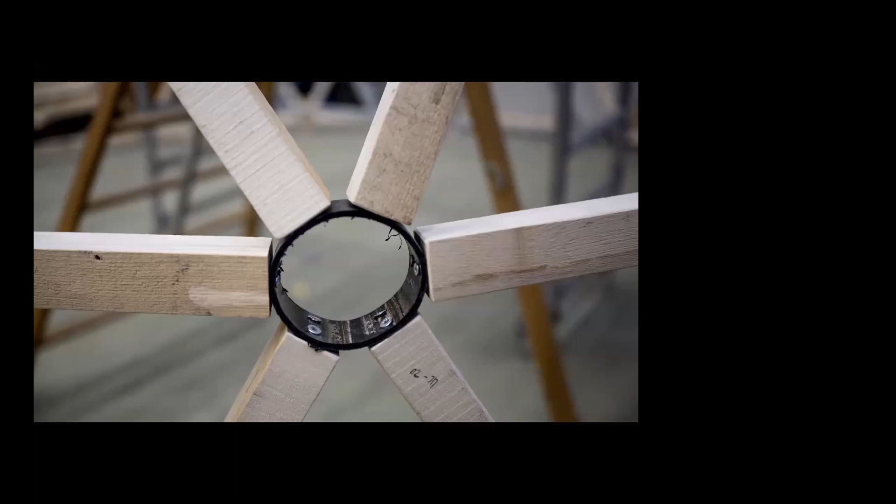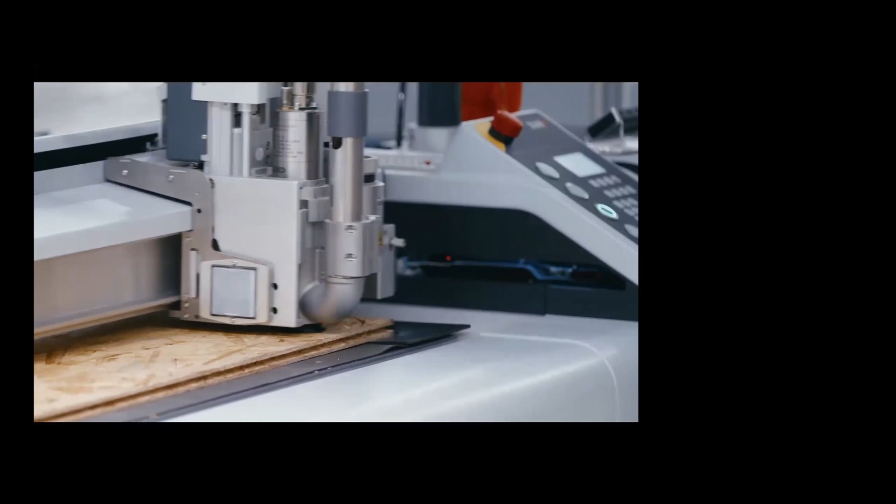And to do so, we used digital fabrication. So while part of the team was assembling the dome, the other part was cutting round shapes into the OSB boards that we had left, that you saw earlier as well, using computer numerical control or CNC cutting or milling to adapt really what we had to the reused materials that we found, the pipes, to strengthen it, to aesthetically finish them, and so on. So it's really showing that a pipe can become a connector, like a caterpillar can become a butterfly.

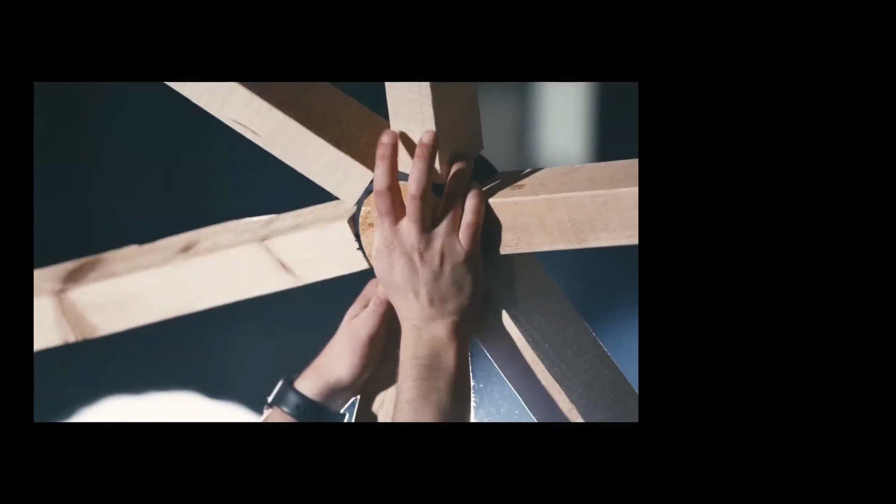So I'm happy to say that our dome has been used at ETH for eating and gathering and so on. Then it has been put at the University of Ghent, where it has been used as a TV and radio station for talks that were live streamed on circularity and other topics. And it has many new homes ahead, such as an outside meeting space for a city hall or a greenhouse. So it will have many different lives in the future.

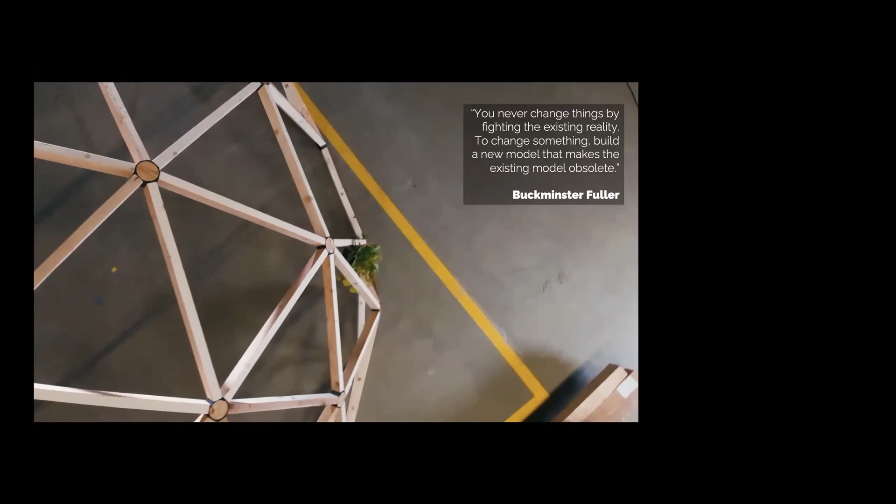So I'd like to conclude with this quote from Buckminster Fuller: "You never change things by fighting the existing reality. To change something, build a new model that makes the existing model obsolete." And I think we clearly need to change from the current linear model to the circular model that I talked about, because we're depleting resources, we're polluting, we are generating waste for our construction industry.

But if we really want to change this, we need to show that the circular model is competitive enough, is more efficient, is cheaper, is faster, and it's just the most common sense thing to do. And I strongly believe that we need to explore digital innovations in order to help us get there. And that is what the Circular Engineering for Architecture Lab is all about.